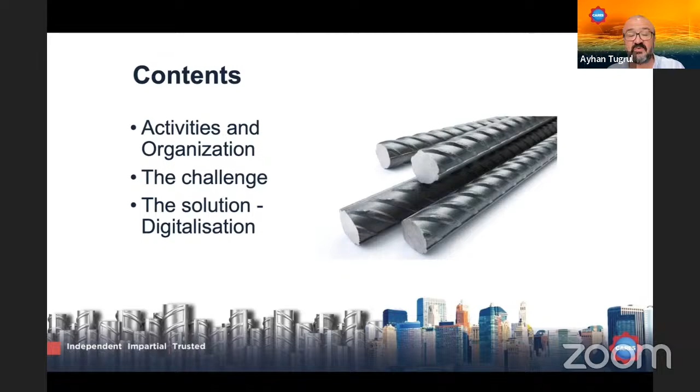If I can quickly start from the contents, today's presentation is going to cover some feedback and information regarding CARES activities and CARES as an organization, and also the key challenges which we are trying to confront, and the solutions and how we are going to manage the digitalization.

A bit more broadly, we would like to talk to you through the conformity assessment model scheme, which covers an upstream and downstream product conformity assessment supply chain. I'm going to talk about the key solution, which is a digital ecosystem we call the digital passport system. I'm also going to talk about the UAE steel regulation, a new piece of legislation published last December, which is going to be fully mandated this December.

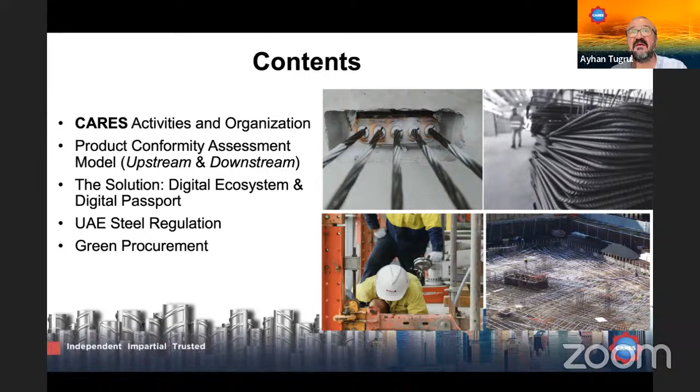Then I'm going to talk about some green procurement initiatives, exactly what's happening in the construction industry, how people are trying to look for more sustainable construction materials, and what requirements people are thinking about. And I'm going to give you some good case studies on what the key construction clients are doing at the moment, as we talk.

The activities and organization, very quickly: we are a conformity assessment institution, a not-for-profit body established in 1983. We do provide, obviously, some of the certification services and activities you can see on the right-hand side of the slide deck. This is the key area we specialize in, and we're conducting those assurance and certification services on a global scale.

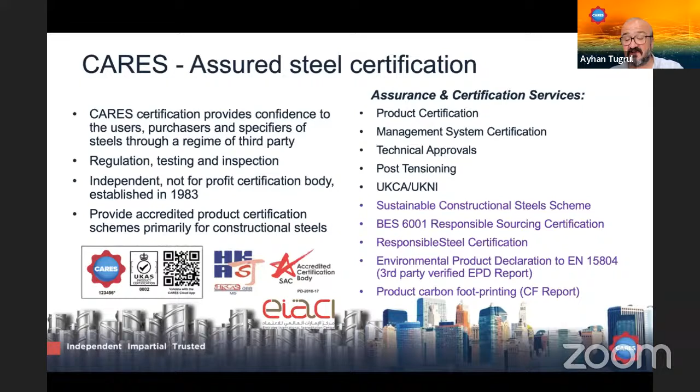Basically, product certification is at the center of our business, and on top of that we started providing sustainability assessment and certification for the steel industry, as well as other suites of products, as you'd see from the list here. All our services are accredited by internationally recognized accreditation bodies, some of the key ones listed here as well, as you can see.

So this is the broader prospect. It's a congested slide, I know, but since this information will be shared, it's important to understand what level of product conformity certification we are talking about and how CARES is delivering these services. Obviously, the key core services we're delivering are anything and everything about reinforcement steel, together with the concrete products we are in, and we provide assurance services for that.

For different product categories on the reinforcement steel side, there are different product standards, as you can see, from BS, ASTM, and other groups of product standards, and also on the downstream side, which is fabrication and further processing of the reinforcement product, we provide assurance services as well. And for PC wire and strand, welding, and post-tensioning applications, technical approvals are on the left-hand side. On the right-hand side, as you can see, we provide sustainability certifications, as I mentioned, and other management system certifications, integrated.

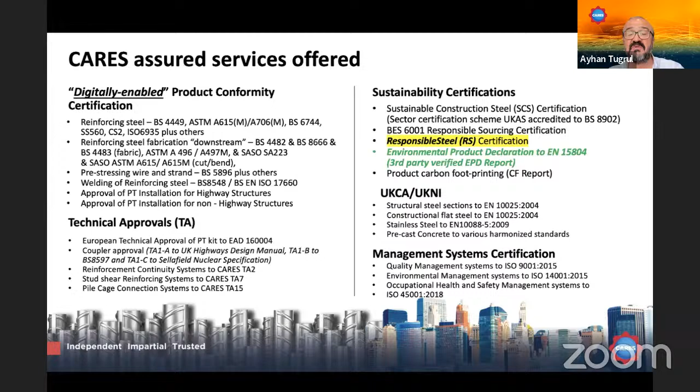This is our organization chart, very simple. CARES has a head office operation back in the UK, and we have entities as you can see in the list. So we have operations in Hong Kong, Australia, Singapore, and quite recently in the UAE.

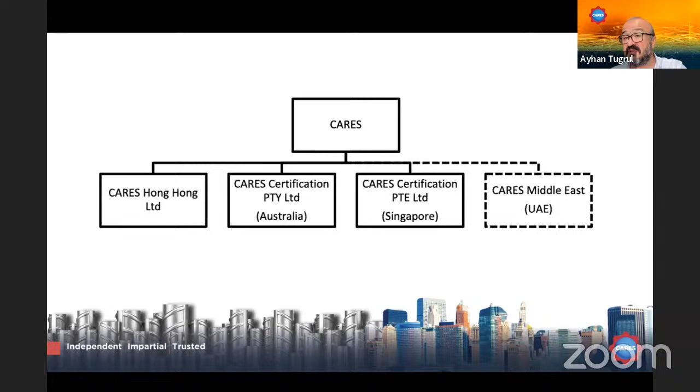CARES has got quite a widespread coverage in the international market. We work in 47 different countries, working together with 140 steel manufacturers. It's quite a wide spread. As you can see from this map, those numbers are the number of companies we work with, and we provide that level of assurance services for the benefit of the construction industry.

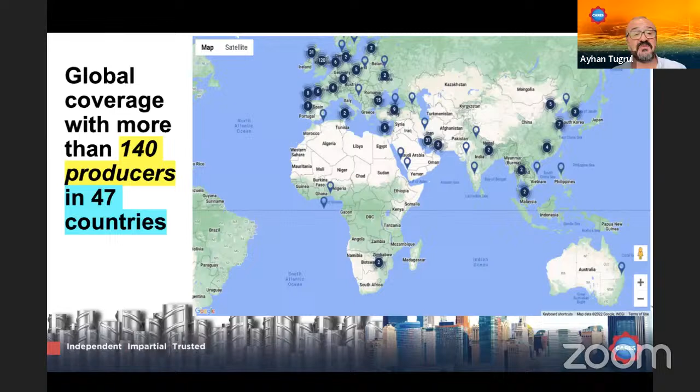These are some of the key projects, and obviously some recognitions where CARES has been specified. As you can see from the key construction projects on the infrastructure side, rail and road sectors, HS2 is one of the key ones, and Dubai Metro in the UAE is again one of the key ones. The RTA is specifying CARES in some of the key construction projects, which is available in the public domain as well, the majority of them.

And also the tallest building in the world, Burj Khalifa, we've been specified, and not just for reinforcing steel, but also mechanical splicing and some other CARES products. And as we speak, currently at NEOM, The Line, and some other key projects, these are the ones where CARES has also been specified within the specifications.

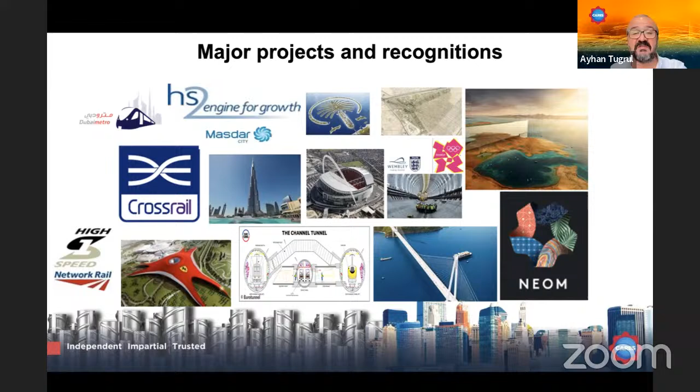Steel production is responsible for around 7 to 9% of global warming emissions, according to World Steel. World Steel is an organization where more than 75 steel manufacturers are members, working hand in hand. They are sharing their product data, environmental data, and statistics, which again is something available in the public domain, so you would be able to see the details.

On average globally, we're talking around just slightly under 2 billion tons of steel expected to be manufactured this year. Half of this 2 billion tons is expected to be in buildings and infrastructure, and another half of that is going to be reinforcing steel. So we're roughly talking around 400 to 500 million tons of steel.

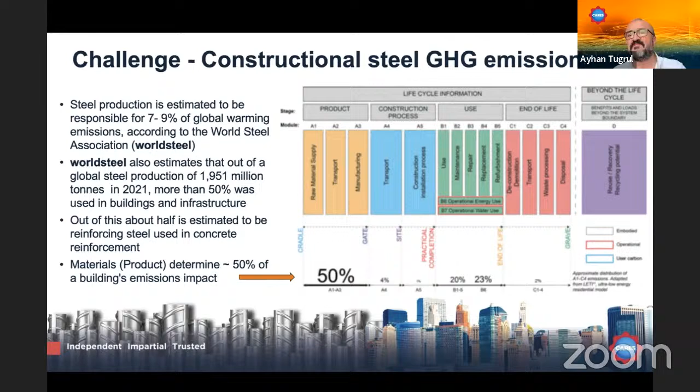50% of that is basically coming from A1 to A3, which is the product stage. So you can understand how important it is to find out where the steel is made, how it's been manufactured, processed, and shipped into the actual construction site. These pieces of information are becoming extremely critical, and that is exactly why we need to find out how transparently we can reach this critical information and use it in our construction projects.

So obviously, when we're talking about steel and the embodied emissions in steel products, there are three key categories of production routes. Basically, we're just categorizing it according to different product types.

But historically, in Europe, most structural steels have been made by blast furnace or basic oxygen furnace, which is based on virgin iron ore, and then reinforcing steel using electric arc furnace. Stainless and special alloy steel, again, blast furnace and basic oxygen furnace, which typically have higher emissions compared to electric arc furnace steel making.

So with domestic and regional production, we need to understand what sort of product type is manufactured locally, and what technology or way of steel making is used in our region, specifically if we're talking about the UAE, for example, or GCC. In the later part of the presentation, you will understand what exactly the type of technologies has been used to manufacture that sort of steel products.

So there are lots of discussions going on in terms of understanding the embodied carbon and emissions, especially from a technology point of view, how exactly novel technologies can be implemented, and how these novel technologies can help to cut down greenhouse gas emissions, and what sort of technologies can be implemented and used in the industry.

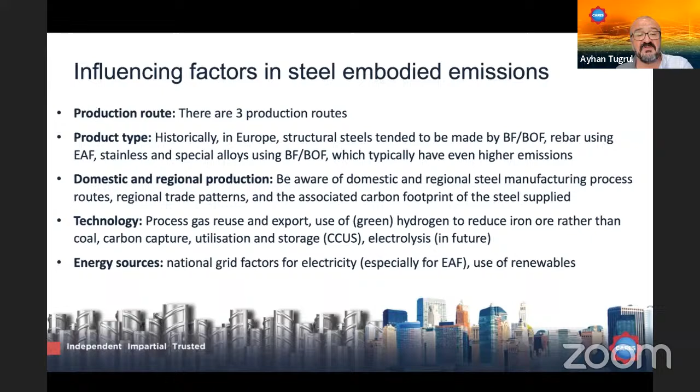The first line indicates scrap, what we call post-consumer scrap, used in electric arc furnace steel making. This is one of the key processes where reinforcing steel is manufactured globally. In this route, the recycled content is around 98%, and the average GWP figure, the global warming potential per ton of steel manufactured through that route, is around 780 to 790 kilogram CO2 per ton.

The second one is DRI, direct reduced iron, together with electric arc furnace. Here we again use electric arc furnace, but the raw material is not scrap, it's virgin iron ore, which is processed to manufacture DRI. This DRI is then used in the electric arc furnace to produce steel. The recycled content here varies between 3% up to 32%, and the GWP figure is around 2,000, just slightly above 2,000 kilogram per ton of steel.

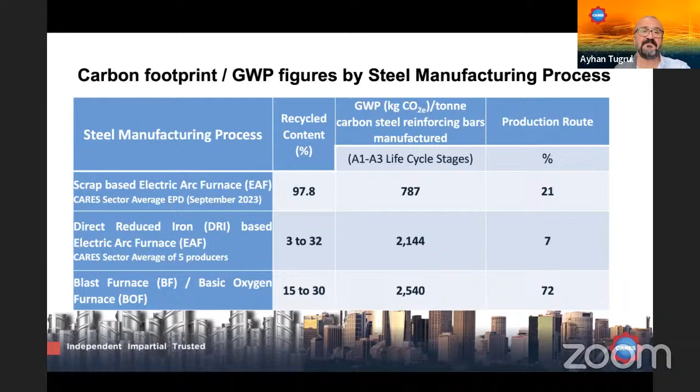Some of their EPDs we already have in the system, and they are presented and in the public domain. You can easily go to the CARES website, sustainability section, and find all these companies' EPDs. Obviously some of them haven't got an EPD yet, I'm talking about AGSI, Gulf Steel, Shattaf, and United Steel. They don't have any EPD at the moment, so we cannot make any estimation based on that manufacturer's GWP figure.

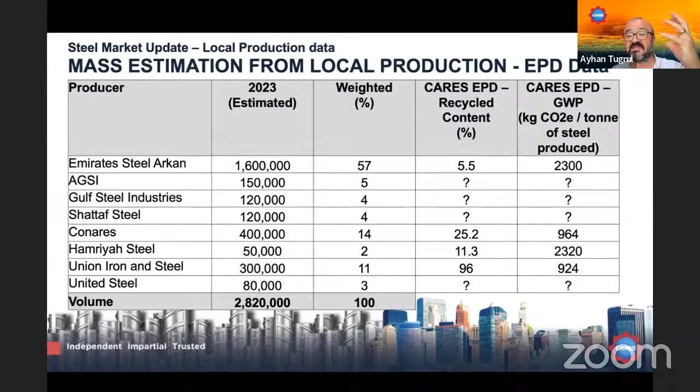So yes, this gives you a bit of an understanding of where exactly we are in the region, specifically in UAE.

From the demand side, technically, how we can reduce the overall carbon in a typical project, the design efficiency and then the circular economy approach is taking quite a considerable amount - we're talking about just about 30%. You can consider reducing that CO2 amount simply by adopting good design principles and good implementation of the circular economy. This is definitely going to be quite effective and considered quite heavily.

If we come to the supply side, we're talking about making the steel, manufacturing it, and processing it. We can directly consider cutting emissions coming from the steel making process up to 28%, simply through the steel making process itself. And we've also got the opportunity to reduce another 6.5% from the electricity grid, the power network. If you decarbonize the electricity grid, you can make a very clear reduction of 6.5% directly from that impact.

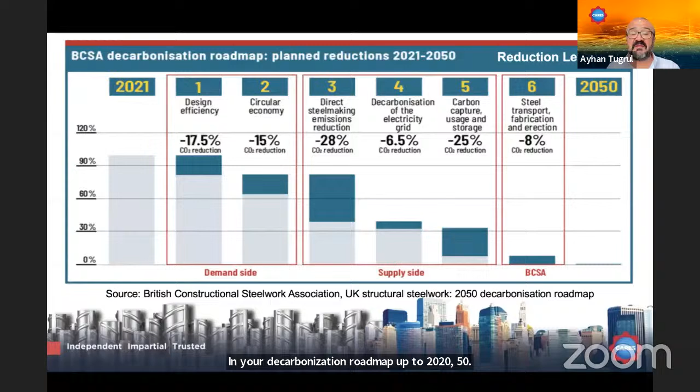Another key issue we've always been talking about - if virgin iron ore steel making has, at the moment, based on current manufacturing technologies, a high carbon impact, why don't we just simply use electric arc furnace only and scrap to decarbonize our construction steel products? Well, you'd probably agree there's not enough scrap right now to feed the entire world's steel manufacturing. That's one thing. So we still need to understand that we will need virgin iron ore to manufacture steel, which is why you cannot completely rely on scrap to manufacture sustainable, green, or low carbon steel.

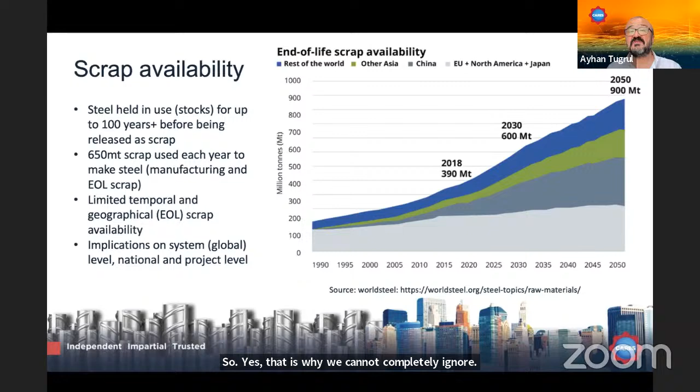We still have to consider there's still going to be virgin iron ore steel manufacturing processes used heavily, until new novel technologies are developed to completely decarbonize the process itself - not just relevant to scrap, but also the steel making process. This is another quite important approach we need to understand, which is why we cannot completely ignore the lack of scrap availability in the entire world.

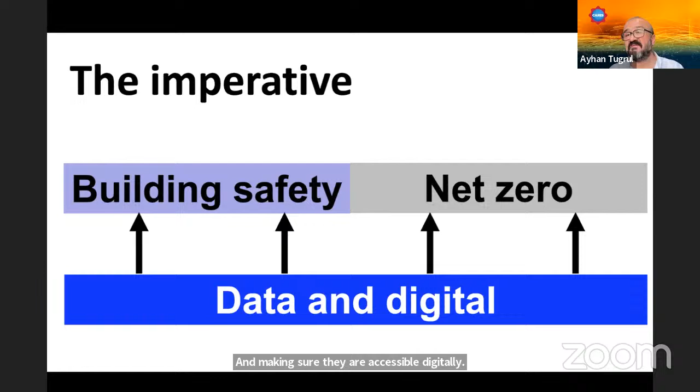The challenge is how am I going to combine building safety requirements with net zero, especially from a steel perspective and steel construction products. How am I going to make sure I can ensure building safety, and also access accurate data that this is also net zero at the same time? So obviously, the only way to do it is managing your product data and making sure it's accessible digitally. These are the key imperatives we believe in, so we are really following this and trying to understand how we can support it.

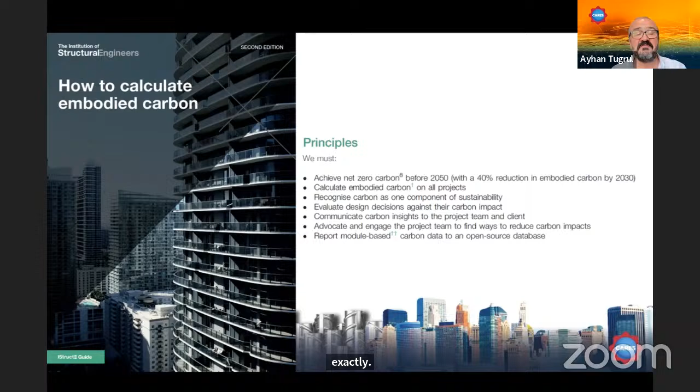I don't think this is unfamiliar to you - you've probably seen it before, because this is one of the IStructE publications. It's a very good guide, and we really like to refer to it and use it when talking to different stakeholders. It's a good document - if you read it, you'll see the key principles mentioning and addressing what exactly can be done in terms of decarbonizing. I'm not going to dive into detail, but I'm just showing you as a good reference document. This is another important step.

The hierarchy, which has been very clearly presented by IStructE's senior team in different webinars and seminar programs, is quite critical. We need to first of all stick with this key hierarchy to understand what exactly I can contribute to decarbonization, starting from building nothing all the way to building efficiently.

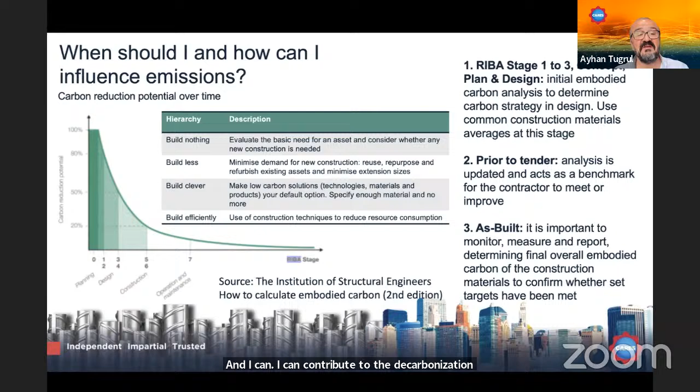IStructE and CARES have been working quite closely together to review and report this GWP figure for construction steel products, specifically focusing on reinforcing steel products. This figure has been shared with the IStructE team and published in the guidance document, so it's easily available for anyone who would like to access it.

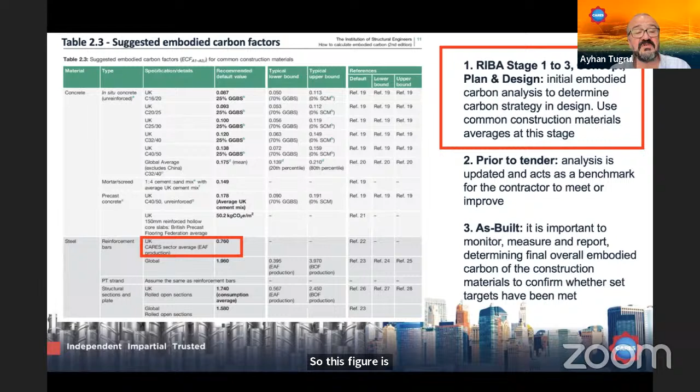This figure gives the CARES sector average figure, shown in the red rectangle. The recommended default value we've been recommending to the industry to consider through EAF production, electric arc furnace steel production, is 760 kilograms CO2. That figure was before we published our most recent sector average. The new sector average GWP figure is 787, so it's not too dissimilar, but it's around the same rate we're talking about.

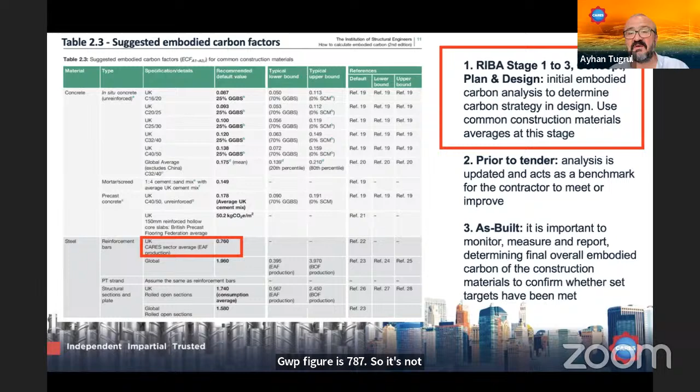And digitalization is going to be quite key. Let me put all this into context here.

As consulting engineers or structural engineers, we may not necessarily be fully aware of how convoluted and complicated this supply chain really is. In a typical construction project, the steel is probably manufactured in the country of origin, then transferred to the next door neighbor doing the fabrication, cutting and bending, processing, mesh making, fabric manufacturing, welding, and so on, and then shipped to the construction site. Well, it's not really quite like that. So we just need to understand how complex the supply chain is.

It is really very complex because steel products are one of the most heavily internationally traded commodities in the world. Any steel producer, depending on market conditions and cost advantages, can trade steel thousands of miles away, and it can be used in any construction project. If you don't really understand how this complex supply chain works, you probably wouldn't be able to clearly understand what impact you need to consider when calculating the carbon impact and the other key traceability aspects of the products you're bringing into your project and using.

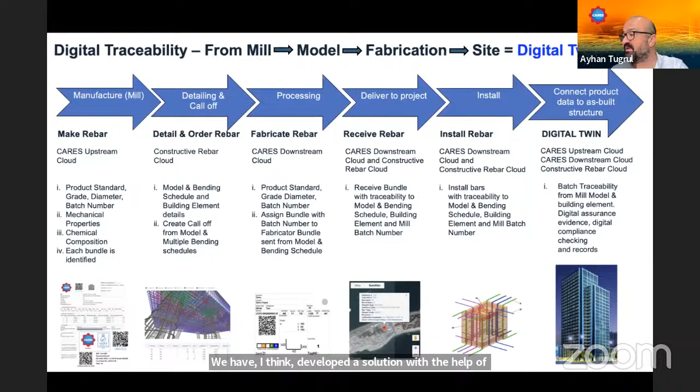The CARES Cloud system enables steel manufacturers to publish their CARES digital records into the CARES Cloud system. These digital records are the key product records and also environmental records that you would need. This record contains the product information, the properties, and also the sustainability credentials, basically recycled content, or EPD data, which is GWP figures specifically per ton of steel.

Again, we call it carbon footprint. You would be able to access it directly by simply implementing the cloud technology.

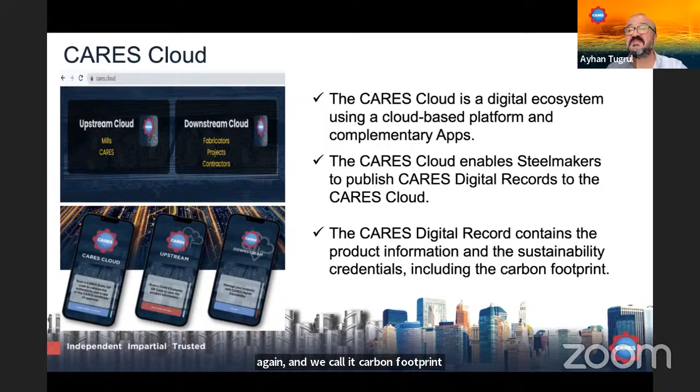As-built embodied carbon is the key parameter right now, we just need to understand how we can control it. As I've already touched on, the source of rebar could be thousands of kilometers away, and you could end up shipping that reinforcing steel, construction steel into your country, and then process it into reinforcement products, and then use it in your construction project.

So especially right now, for the consulting engineers, the sustainability professionals, structural designers working in this area, they are desperately in need of high quality data, which will help them to accurately and quite efficiently design their projects by fully understanding how the material supply chain works for the construction steel product.

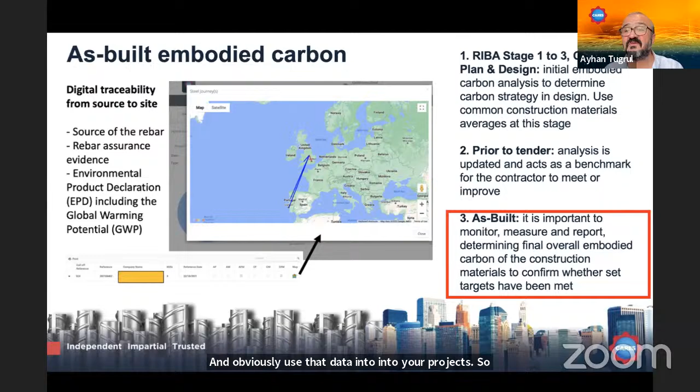CARES Cloud system enables them to access that product data and obviously use that data in your projects. So this is bringing a lot of transparency into the supply chain by simply understanding all these critical steps.

So how are you going to make sure you can have accurate data representing that steel mill in terms of their tonnages, in terms of their GWP data, which is the carbon data, and how you're going to calculate the total GWP figure for any segment or any critical part of your construction project.

Well, the cloud system enables you that. And with the help of CARES Downstream Cloud, it enables you the use of actual carbon data during the construction phase, and it overcomes many of the challenges really identified by the industry.

I'm sure you would second it, because the most critical information is to understand exactly what the carbon data of your steel products is, for example, and use it in any of your construction projects.

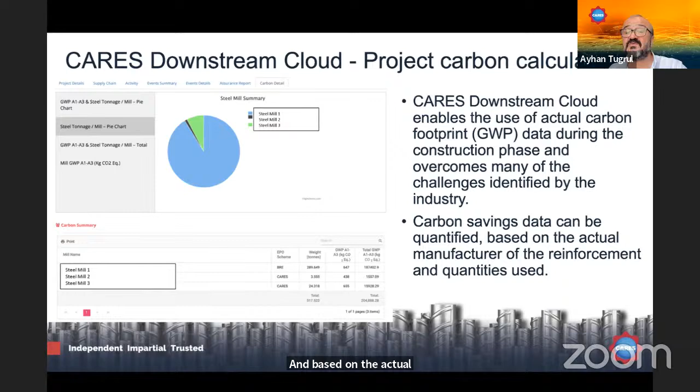And then there are a lot of carbon savings. You can get it quantified based on the actual manufacturers of the reinforcement, and also based on the exact quantities used in any of these construction projects.

So the key, obviously the key critical benefits, I think we need to talk quite openly about. The traceability of the product from the manufacturing source to site, because it's not hidden anymore.

You would be able to see 100% which mill the steel products have been manufactured in, and you can trace it back all the way down to the source. When I say source, it's the cast or heat or batch specification, because this is quite critical. And if you have that traceability, then you would understand everything about the product specification.

The second part is the most reliable, accurate, and easily accessible database where we keep the carbon data, the GWP figure. So that information is available and accessible through the help of the cloud system.

And third, probably one of the most critical key benefits is accurate as-built carbon accounting. This is the one most sustainability consultants or key engineers working in this area just want to understand how they can get this figure. The cloud system enables you to really find out and use this accurate as-built carbon accounting data.

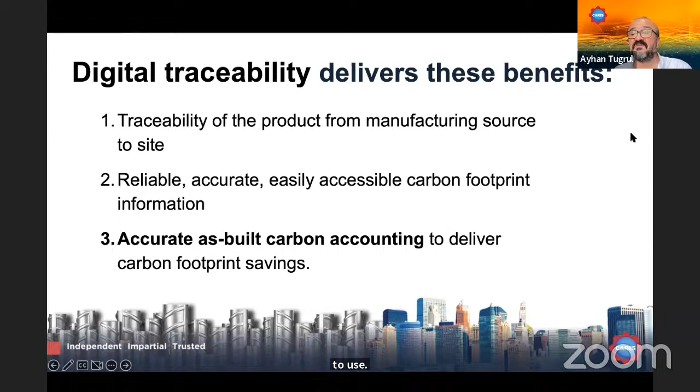Okay, this part so far has been talking about the carbon, the CARES Cloud system, the CARES Cloud digital tracking, and where the steel is made. I'm talking about roughly 140 steel manufacturers producing around 1 million to 1.5 to 2 million tons each, so roughly 300 million tons of steel product data is available in the CARES Cloud system.

And for those who have completed the EPD reporting system, part of the sustainability certification, the GWP data is also available in the cloud system. We call it the carbon data, so you can easily download it and use it in your projects if you're authorized to use it. Okay, this is quite interesting because in the UAE...

The MOIAT, the Ministry of Industry and Advanced Technologies, has published a new regulation. The industry stakeholders, including CARES, helped to generate this new regulation.

It's a law, a legislation, published with Cabinet Resolution number 121 in 2023, which is representing, I think, the sequence number. We believe this was published in December last year. So this is, in short, the UAE system for construction and steel products. It includes lots of new changes and new features, which I'm going to take you through. Of course, not the detail of the entire regulation, but very key highlights, if I may.

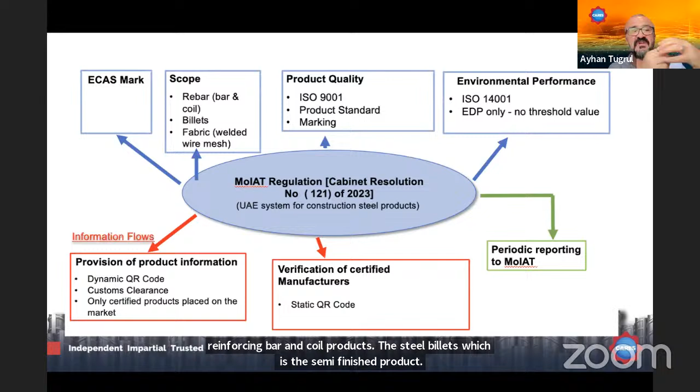It's a summary infographic, which shows you what it means, basically. The scope right now covers reinforcing bar and coil products, steel billets, which is the semi-finished product used in reinforcing steel manufacturing, and also welded wire and mesh, in other words fabric products. So this is the scope.

But we were told by the ministry that the industry needs more. So that's why CARES is going to work hand in hand with the stakeholders and also with the ministry to help regulate the other steel products, including structural steel products, merchant bars, flat steel products, and high carbon PC wire and strand used in the post-tensioning sector industry. We believe they are all going to be regulated, but we just have to be patient. This one is the first, and then we need to wait.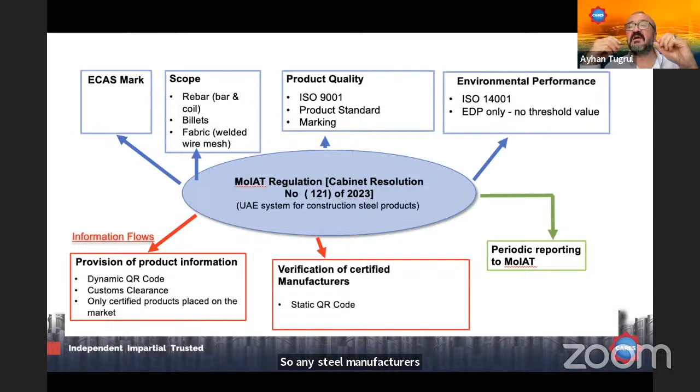It's been successfully implemented, and yes, these are all the key requirements, but I'm just going to draw your attention to a couple of key aspects of it. The first one - and I haven't seen any other regulation in the world which includes this as a requirement - is EPD reporting. So any steel manufacturer who wants to manufacture steel and trade it in the UAE, or import it into the UAE, needs to make sure the product has got an independent verified EPD reporting. That is, again, something quite unique, and I think taking the lead compared to other worlds or other countries. I haven't seen any other similar requirement really as part of the legislation.

So the UAE made a fantastic step, and then they made it a requirement, which is going to give a lot of clarity and accuracy in terms of proper calculation of this carbon data for construction projects when it has been fully mandated, which is December 2024 onwards.

Other products and other requirements within this regulation - as you can see on the bottom left part, you will see the digital aspect is also embedded into the regulation. So there are a clear set of requirements about the cloud, which again is something quite unique. It covers the digital integration of product data and environmental data into the UAE supply chain. And it will be linked, as far as we understand from the ministry, to the boundary controls and checks into customs. So then it will be a completely watertight system to control where the product is coming into the UAE, where it has been made, and that it has got the necessary assurance certifications and approvals in hand. Otherwise, they won't be accepted. Again, this is something quite unique and quite interesting.

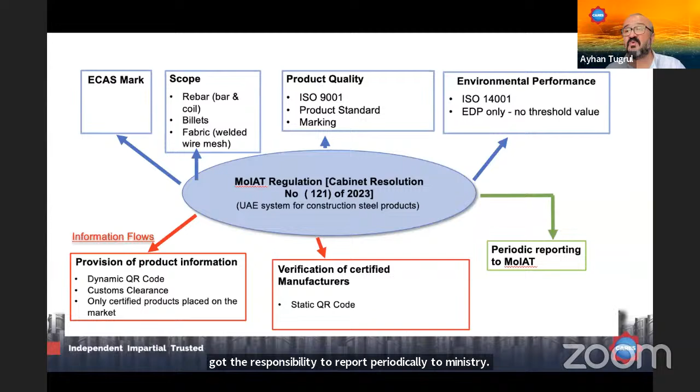This is the content of the legislation, and you will see the scope of application - we just touched base on that briefly. Obligations of the applicant - what the applicant needs to do, and exactly what necessary preparations they need to follow. And obviously product environmental requirements, which I've just mentioned, touching base on that, in addition to the technical and operation requirements. And the ECAS mark, because this is going to be a requirement - so we need to make sure we can find the ECAS mark on the product label and also on the product itself.

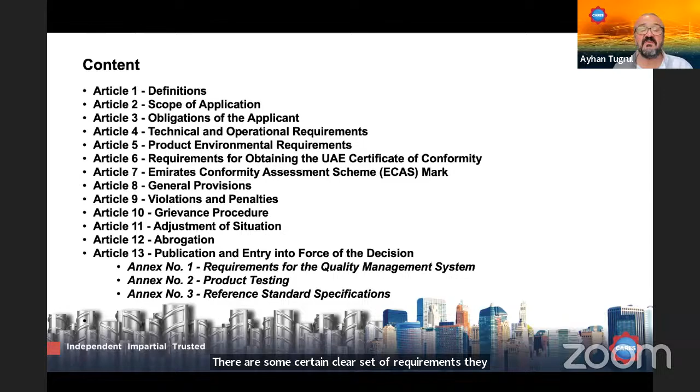There are two key annexes, annex 1 and 2. One mentions the requirements from a manufacturer point of view, what exactly they need to comply with. It's very straightforward and the requirements are very clear. The second annex is about the testing requirement for the product. If the product is introduced into the UAE market for the first time from that specific manufacturer, there are certain clear sets of requirements they need to follow. This is made quite clear as part of this regulation.

Couple of key points on the environmental part. In the regulation, article number 5 addresses the product environmental requirements. It mentions that the mill, the steel producers, has to be ISO 14001 certified from an independent and accredited certification body. That's one key requirement. The second part is EPD reporting. The manufacturer of carbon steel bars for concrete reinforcement, and billets used in the production of reinforcement and coil products, shall furnish an EPD report.

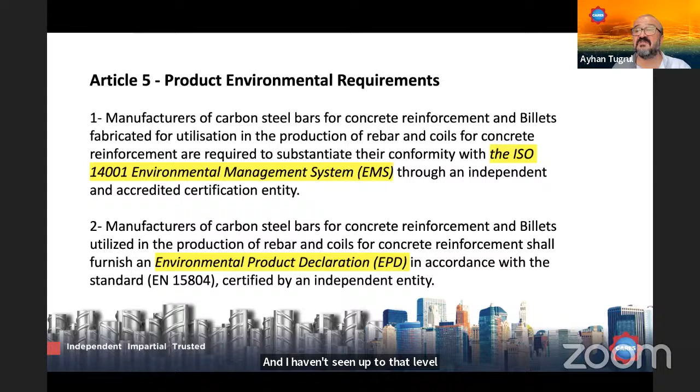That's why it's unique and it's now part of the legislation, which is quite a game changer regulation. I haven't seen that level of integration into legislative requirements in any other country. This is the cloud, where the cloud is mentioned. In Annex 1, the requirements of the quality management system, Section D, addresses it specifically, and Clause 13 addresses the cloud specifically. There are many other clauses in the legislation. If anyone is interested, I would be happy to share the link so you can see what these key requirements are going to be.

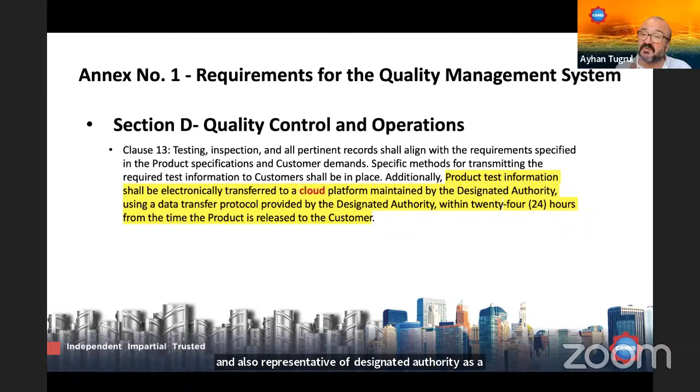This clause addresses very clearly what electronically available product data means, and what information is to be made available and for which organizations. The key requirement is making sure the relevant designated authority has access to that digitally enabled product data and environmental data, and also a representative of the designated authority as a notified body, like CARES. We are responsible for operating that cloud system to make sure the product data can be made available for access by the ministry.

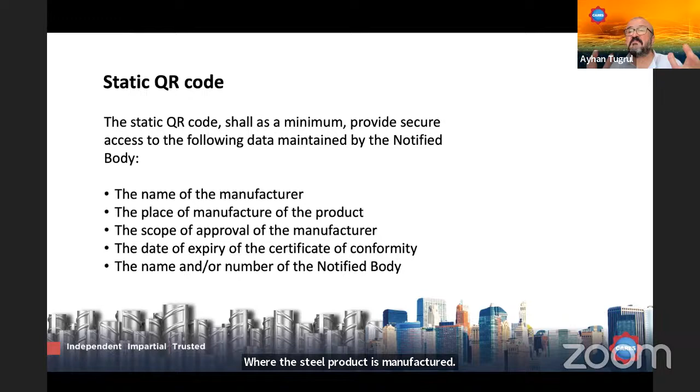This is the key requirement from the digital side. Static QR code is one of the key ones, which gives you the provenance data. As I mentioned, it's very critical and important to know where the steel product is manufactured. Otherwise you wouldn't know how exactly it's been made and how it's been transported into your area where it's further downstream processed. So if you need to know that information, the simplest approach of the digital cloud system is integrating the static QR code, which is very straightforward.

On any product label, on the steel bundles, when you go to any construction site right now in UAE, it's already been implemented, by the way. If you simply scan it, you will be able to get that information listed: the name of the manufacturer, place of manufacture of the product, the actual scope of approval, date of expiry of the certificate, and also the name and details of the notified body. You would be able to access all of that by simply scanning this static QR code.

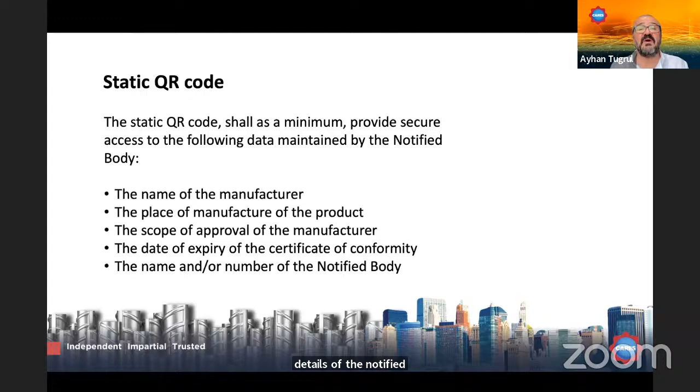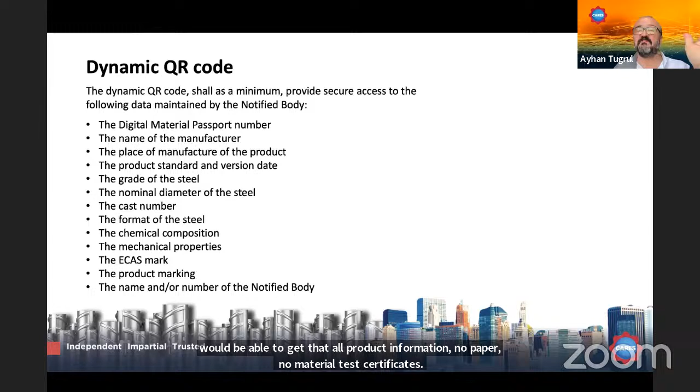This is again something quite interesting. The dynamic QR code part is more technical, giving you access to the product data. As I mentioned in the digitalization section, you would be able to get all that product information - no paper copy, no material test certificates. Everything is directly retrievable by simply scanning the QR code on the product label. If you scan the dynamic QR code on the product label, you would be able to get that information right away if you're an authorized user. That's again something quite important and really quite a game changer.

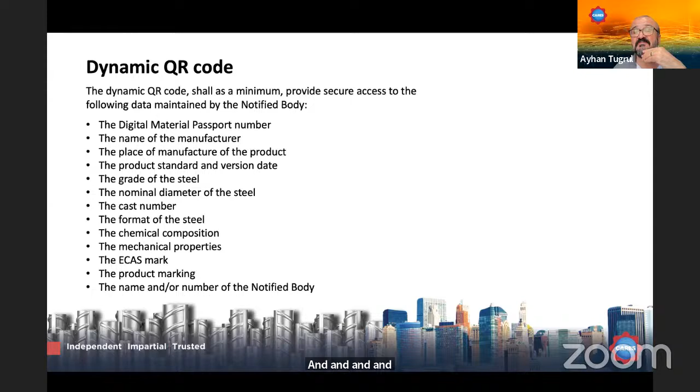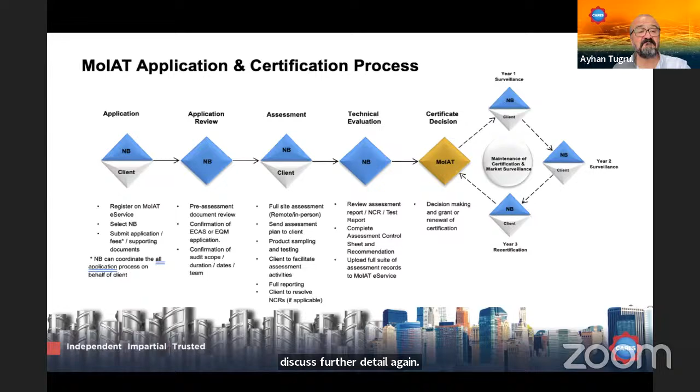Okay, these are the last two slides. I'm just going to talk through them.

As we talk, most of the clients, whether government entities or private project owners, want to understand how they can specify low emission or low carbon construction products. One of the key ones is steel. We don't name it green steel, but this government entity specifically mentioned green steel. I'd like to drag your attention to see how the whole world has started to change really from the procurement point of view.

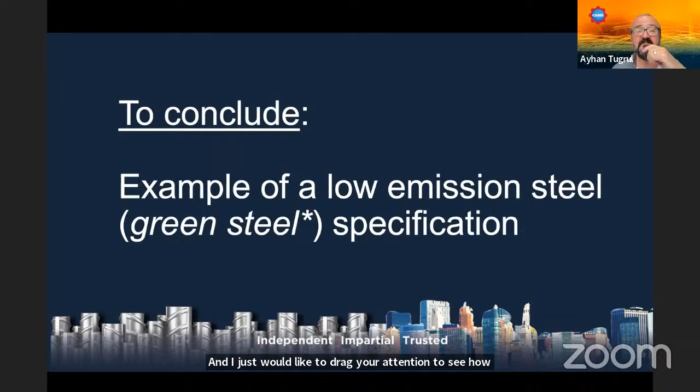This institution we're talking about is in Singapore. If you dive into detail, you'll find a lot of information on their website. This is LTA, the Land Transport Authority, similar to our RTA in UAE, in Dubai. There are good definitions about their rating systems and how the green construction product is certified against, what exact steps they follow, and etc. This is something CARES works on with the Singapore government, especially the Green Building Council, who are the developer of this green building product rating system.

So we contribute to them from the steel industry point of view. This is the spec. If you look at that, they made, I think, quite bravely, a fantastic new specification, and the key requirements they're addressing here are in projects LTA is working with. Of course, not entirely the full projects of LTA, because there won't be enough material they are specifying here. So we need to be mindful.

That's why they have an understood and agreed threshold, covering 50% of their total steel needs, which has to be from 90% plus recycled content or scrap-based steel products. That's one of the key requirements, and this 90% is their limit. Then in the SGBC, the Green Building Council rating system, they should be in the leader category, which is the 4 ticks.

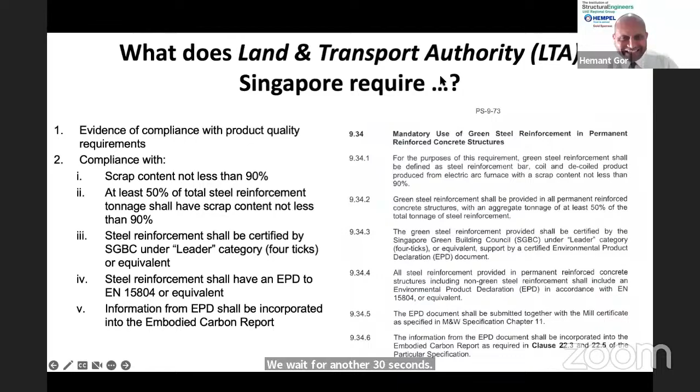So the answer was 0.8 kg per kg. Correct? And now we have received one question.

Ayhan, how does CARES take care of the possibility of people coming up with a forged QR code or some duplicate QR code? How does the digital infrastructure ecosystem guard against this type of forgery?

It's a very good question, and it's very relevant. Thank you to the question owner, to be honest, because this is quite critical, I guess. This is very likely to happen on paper copies, and anything and everything in this PDF world - you know how easy, unfortunately, it is to be exposed to those risks of falsification, fraud issues, and so on. But in this QR code system, the information you get is not coming from anybody.

It's coming from our cloud system. So if you scan something made up, a fake QR code, you wouldn't be able to get anything because it's not linked to any system.

Simply, that QR code system is produced under the license of CARES by the manufacturers we assess and audit. We keep their system under control. They have an ERP system, like an SAP system, for manufacturing management. This is linked to our cloud system with the help of API, the access points. With automatic transition of that information, it's connected to our cloud system, and then that cloud system enables accessibility by simply scanning the QR code, which is linked to the manufacturer's product data. So it is extremely, extremely unlikely to be faked.